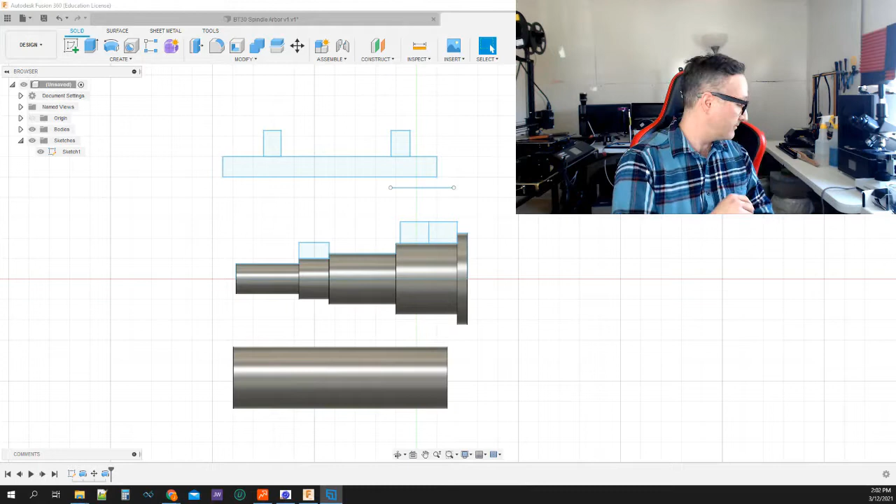But at any rate, the reason it may not necessarily, I should have grabbed a tool holder. I don't have one sitting around me.

A little BT30 tool holder. The reason an imperfection in there doesn't always affect the net runout is because those are nice, hardened cones that you're sticking in there. Sometimes whatever that imperfection is gets bridged, and it doesn't really come into play. And depending on where the imperfection is on the taper, that also makes a difference. So really, to get the best reading of your runout accuracy, the whole cone on the inside almost has to be taken into consideration.

Now, if there's something the indicator is really going nuts over, then there's probably a problem. But I've seen guys rotate one of these and think, oh, this thing is out of whack. But by the time they got their tooling in there, it's like, okay, I'm getting just as good results as one that measured differently. What gives? It's because of the whole thing, how it connects to each other.

You've got to have what's called a test bar, and they make them for each size. They have them for BT30, Cat 40, all the BTs, Cats, and HSKs. The advantage is that when you mount it inside your spindle, it now takes into consideration all of the different surface anomalies that your indicator may have detected, which may or may not make a difference in what the net runout is to you.

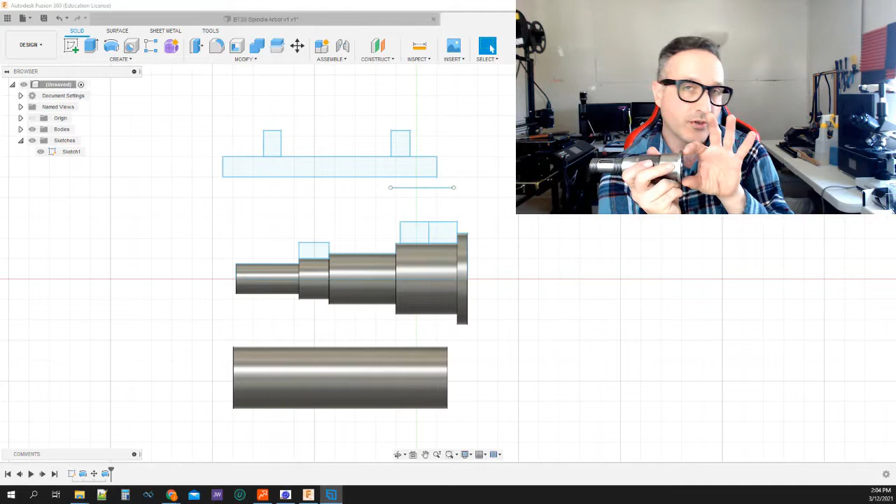So that sticks in there, it pulls in there with a pull bar, and then a certain portion of a straight shank comes out here and sets. And you have to get a quality one, and I'll tell you why.

So what happens is you'll put your indicator out at the farthest most point, and as you rotate this, now you can start to get an idea of what its net accuracy is, and that will give it to you combined with what the bearings accuracy is going to be, what the accuracy of this taper is going to be, all interacting together. That's the way to do it.

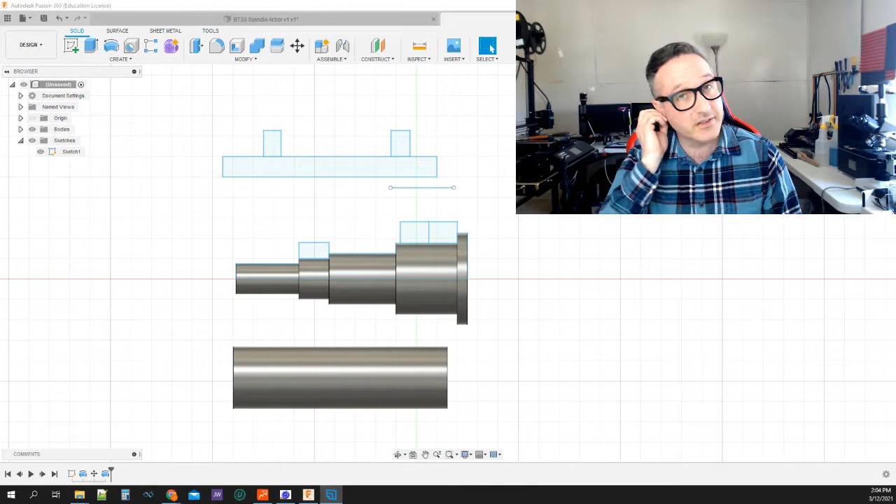Now, the test bars, you've got to be really careful even on which test bar you get, because if you decide, oh, look, I found a test bar I can get out of Asia, pretty cheap. Well, there's really going to be no way of knowing what you've genuinely got until you send that off to get it certified. And the other portion is you sometimes don't know the quality or what the hardness of it is, or if it's got some deformation, when you pull that thing tight.

The best way is to get a certified test bar, either out of Europe or stateside. And they're not cheap, unfortunately. For the average guy, it's not real practical, because you could probably pick up a used one for between $500 and $1,000, but you're gonna have to get it recertified. New ones, man, they can be in the thousands pretty easily. So it's kind of an expensive thing that might ultimately end up being academic for you, but that's the only way to genuinely measure it.

And if you're putting an indicator on there, it can give you an idea of the runout, but it's not really what you need to know. Unfortunately, there's no easy way other than spending the money on that thing. But again, if it's a big imperfection, it's a problem. So now you know how you can measure it. So if you're making something that's conical and it rotates, now you know how to. You'd have to get a custom ground something or other to put in there, and that'll be really expensive. Or you just want to measure the taper on your machine.

Okay, so let's talk about, I'm going to take a drink here. Let's talk about grinding, and some of you guys said you wanted to do some grinding. There's different types of grinding, of course. A gazillion types, just OD, ID, which is what we're going to talk about because that's where experience is. But there's also surface grinders. There are rotary surface grinders. There are double disc grinders. There's centerless grinders. So lots of grinders. We'll talk about just ID/OD.

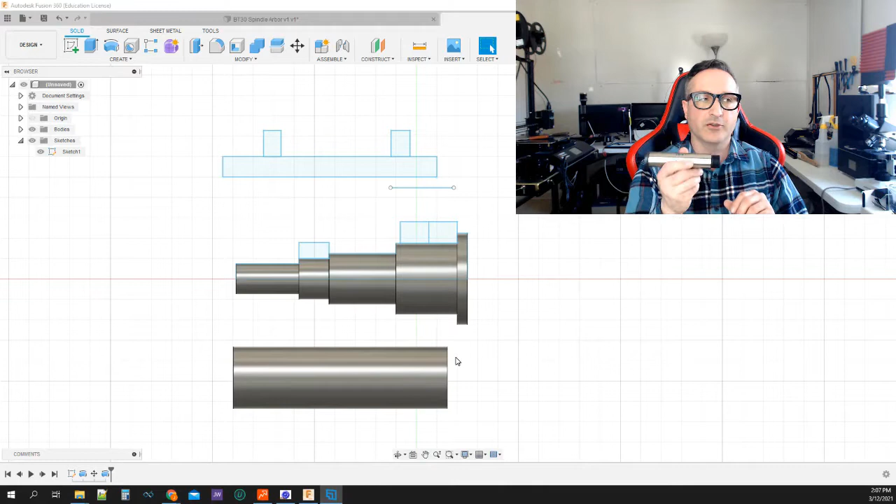Very easy. In fact, I just said I wouldn't talk about different grinding strategies, but here's one. So let's say this bar, maybe they'll put it in a centerless grinder to get the thing really round. And now that it's really round, maybe they'll clamp it into whatever machine is going to cut its final shape. This thing is really round because it was ground ahead of time on the surface before they cut any other features, so when they put this in for a final grinding of maybe an inside feature or a face, they know it doesn't take much work to indicate this in to do the grind.

But what gets more complex is, okay, you've got this flat surface area, but now you've got a conical part on the inside that has to be dealt with. So now it adds a little bit of new complexity. But see, all of our headstocks, the spindles we used in them prior to introducing the new variety, they were all just straight shanked, which was very easy for grinding, and we never really had to think about it. We just told them this is the accuracy we need, and the machine shop would cut the piece and then they'd go off to the grinders and just be done.

But we had a bit of an educational curve when it came to making something a little more complex like this. It's because there's steps in here. And this is what we didn't know, and I'll give you a little bit of history of how we even came to this. Some of you know this: the first couple batches of these, and this is one of the defective ones we got out of China.

They messed them up a couple times, and we've had to have spindles remade so many times. It is embarrassing to even tell anybody how many times these were redone, in whole or in part, before we actually finally got down to how these had to be done, and ultimately ended up having to change the manufacturing strategy to get what we need.

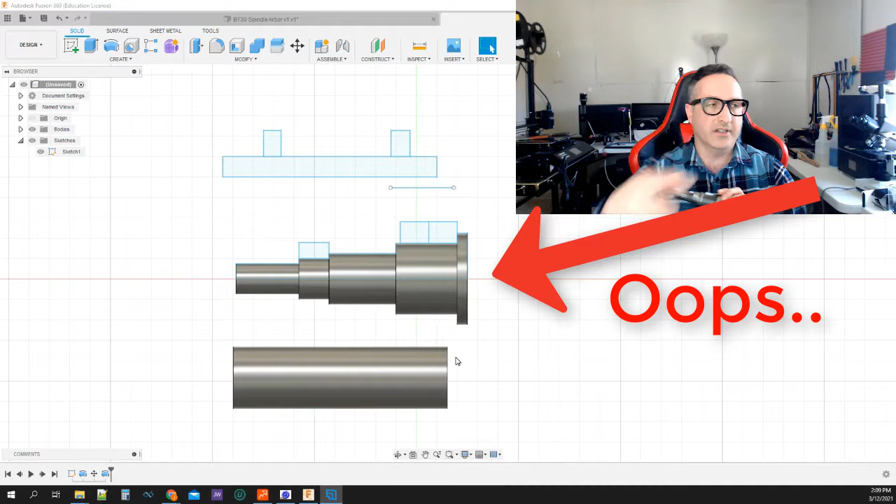Okay, so the area that gets complex that we didn't realize is each spot that there's a bearing. Now, if you look on the screen over here, you have to forgive me if my eyes are going all over the place. I have multiple screens. So if you look at the screen down here, you'll see this is, let's say, an example of a spindle arbor that's got multiple steps in it. And this is going to represent where the bearings sit on the spindle once it's installed.

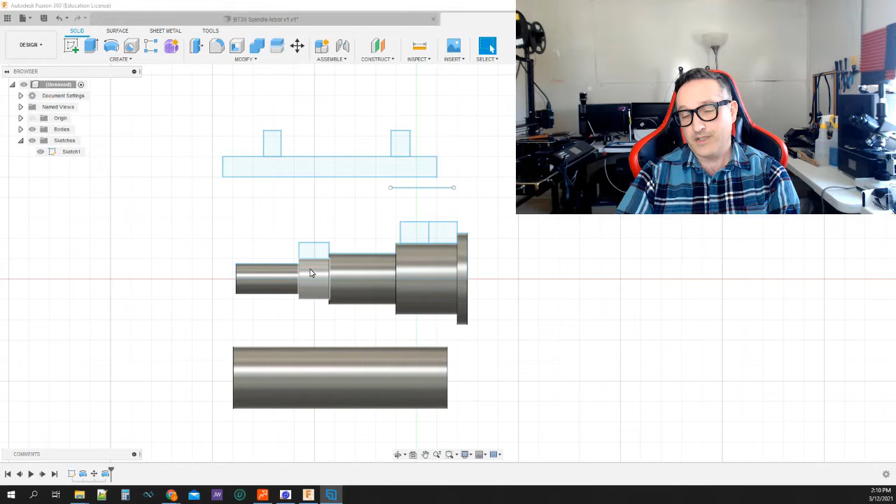Now, these areas are going to be critical for your grinder. What they have to do is put a test indicator here, here, here, and here. So each area where the bearing race is: a bearing sits here, a bearing sits here, and a bearing sits here. So they will figure out what the runout is on each of those, okay? And then they have to average it.

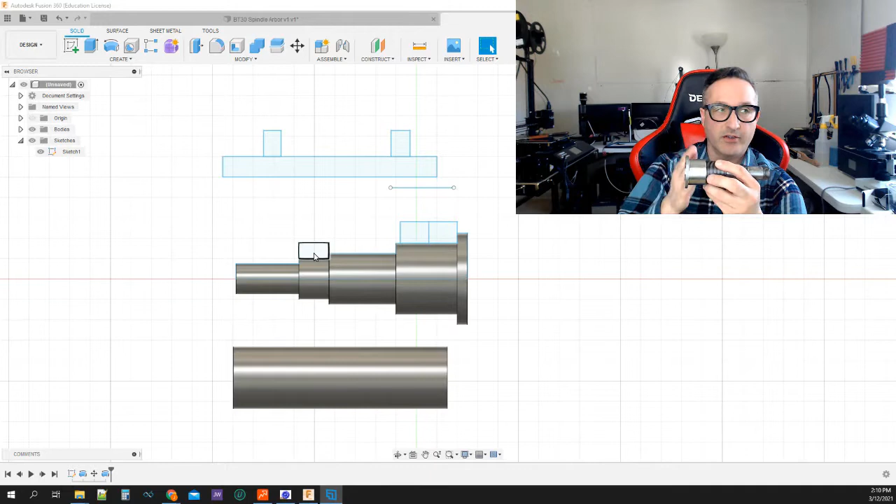So they'll average it, so then they'll know how much runout this thing will ultimately have, because we know it's not going to be perfect. You're not going to actually produce anything literally perfect, like 2 millionths or something like that. So they know, okay, now we got the average, so that when we come in here and sweep the inside of this taper, as a whole, it's going to be accurate.

Because you can't just do this surface right here, or just this area, and think, okay, since we know the runout here, we'll chuck this, and then you come in and do the sweep. Can't be done, because if you look on the screen again, this bearing that sits over here in the back, if it's not right and the runout is different enough from this, it's still going to be doing this kind of thing. So it has to be right all the way across.

It gets a little more complex because these all have to be dialed in, so to speak, manually. When they're setting these up, it's time consuming for the grinding shop to actually do these. And I thought they were just putting these in machines and going, basically. I knew they had to do some setup, but not as much.

In fact, the grinding shop that we ultimately landed on wouldn't even allow us to photograph the setup or show it being done, because apparently their strategy is kind of their bread and butter and trade secret. So anyway, the different areas here, different steps, can make it a little more complex, and the longer the part, it could also be more complex too.

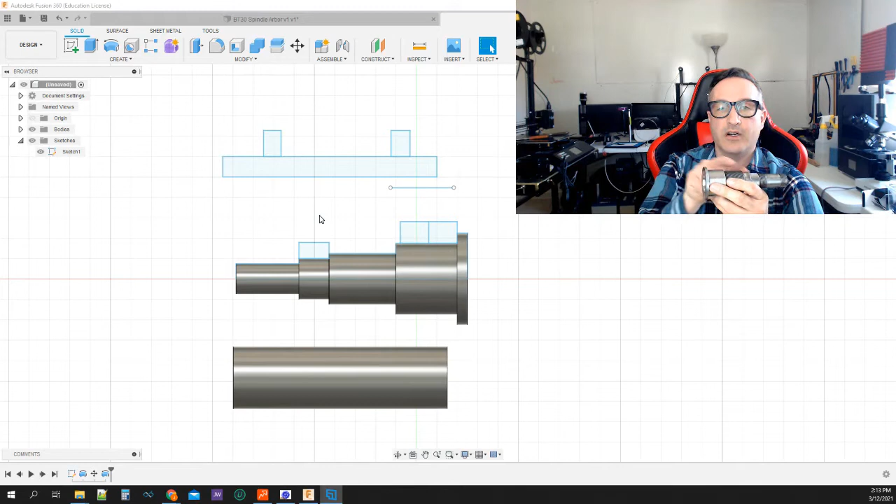So this area where these bearing races sit ended up being critically important. We knew it was important, but they ended up being more critical than we thought. Because if either of them has very much runout, or the combined average runout is very high, then you can't get a good grind. And you can't go back and regrind these surfaces, because then it'll be out of spec for seating the bearings.

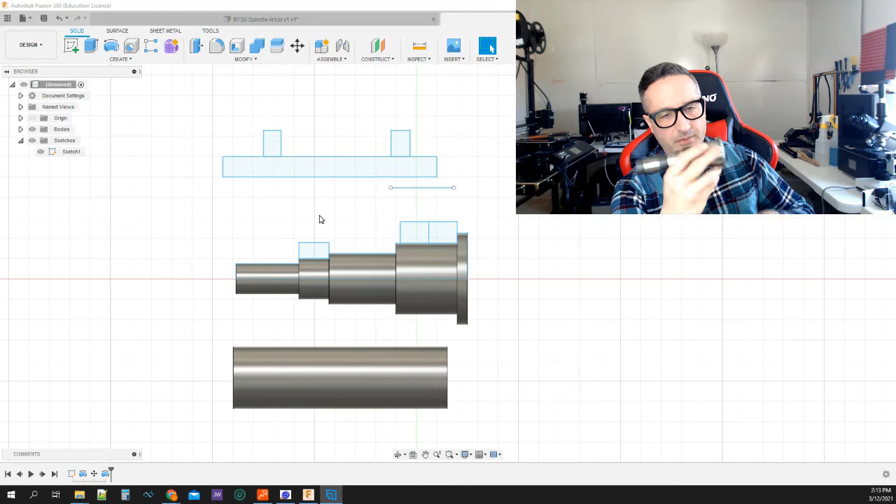And I'll tell you how we discovered this. We discovered this because when we finally got a machine shop that would do us right here, and we got all these cut, and then we sent them all off to get ground, we knew that we got a box of them back of each size of spindle. It's like, these are unusable because they're going to be too far out.

But as we got to assembling some of these, we noticed that there is definitely a portion of them that by the time everything was all assembled and put together, the runout wasn't where it should be. It was maybe anywhere from, let's say, 7/10,000ths, 8 to 9/10,000ths, and some of them even over 1/1,000th. And we had to go back to the grinding shop and say, hey, what are we doing wrong? What gives?

And that's when we found out they indicate these in different spots, and then they have to set this in there. These get all set in manually, and that meant we had to change our strategy as far as how this is manufacturing.

And something for you to consider too, if you're going to get something ground, especially if it's going to be conical or something that's kind of an odd shape, or you got steps in it, talk to the grinding shop first. Sometimes they don't always think like a machinist, though. It's kind of weird. I don't know what it is. Sometimes they can give you some input. Sometimes they don't. When they don't, then it ends up being trial and error and money.

But changing the strategy on this, we ended up having to either make a choice of continue to have these all turned on the lathes and then send them out like we did to the grinding shop, and just know that a certain portion of them aren't going to be any good. And we didn't want to do that,

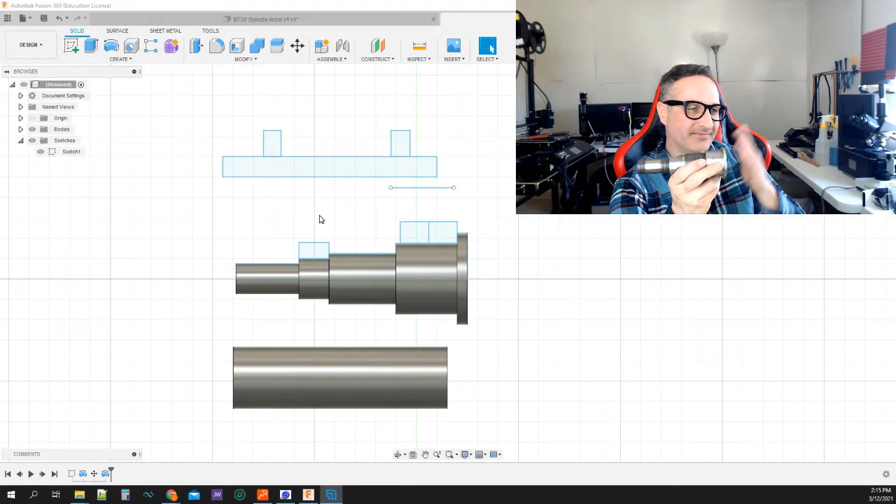So what we ended up doing is, when these come from the shop, cut on a lathe, there's a little extra material on these different surfaces, and then we have the bearing surfaces ground to where they need to be, and then that means we can get this surface and this face ground to where we need them to be, and that, in a nutshell, is what we didn't even realize ahead of time.

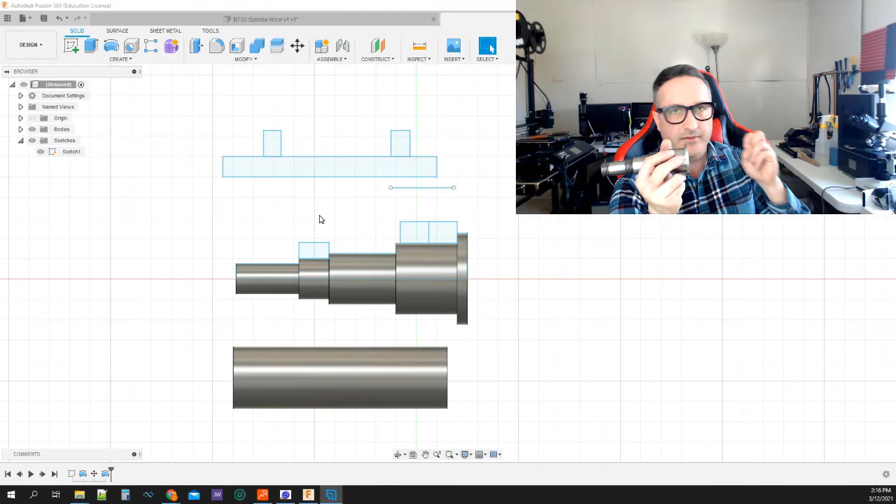Now, if you're introducing a new product, there's always going to be something that you just don't know until you move forward, and you have to make the best decision you can with the information you have and move forward. Otherwise, nothing ever gets done and nothing gets to market.

And what I've also learned too, I know it's a little extra, is each time you have something, let's say on the screen here, you have this CAD drawing that you made and it gets deleted somehow, or something corrupts it, and you don't have access to it, or these mini disasters, like, oh my goodness, COVID hit and this is all delayed, and oh my goodness, they made these things incorrectly over in Asia, and we know they're not going to give you your money back, and each time you have something like this happen.

It's terrible. It is terrible, and it's a growing pain, and it can be a pain for you. It can be a pain for your customer base, but ultimately, it's weird because like on the drawing down here, I've had drawings, and it's my own fault, and sometimes it's not my fault, that the thing gets altered or changed, or something happens that I got to start all over again. But the weird thing is when you start all over again on things, the next rendition that you make is a whole lot better than what you had made that you lost, and it's like, okay, so now this is the way this actually should be.

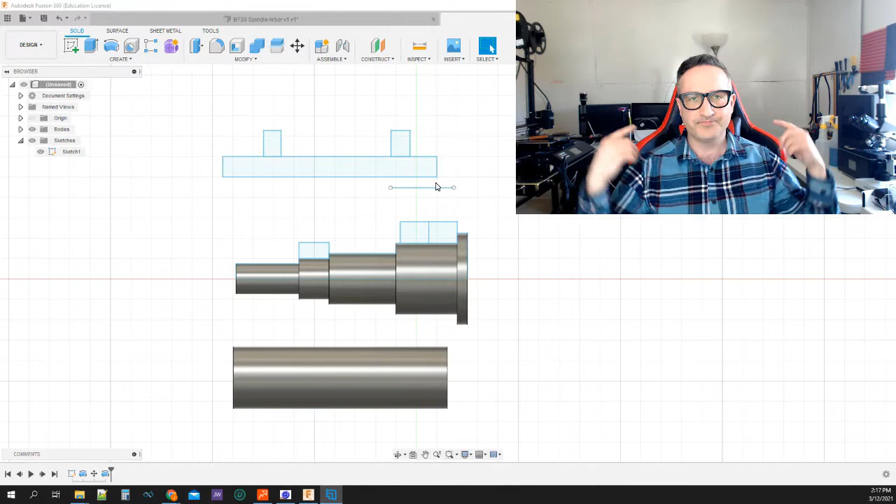So while it's kind of maddening, and you want to kick the couch once in a while when something happens, a file gets deleted, oftentimes it turns out decent. And the weird thing I've discovered is when you're moving forward and you're making parts, and we use a lot of 3D printers, I'll make a video on 3D printing stuff for prototypes. We use a lot of 3D printers, and you start making parts. A lot of what you make is actually junk before you get to where you really need to be for a part. But you want to take mental notes, if not physical notes, of the things that quote-unquote go wrong, because sometimes your best ideas come from whatever those disasters are.

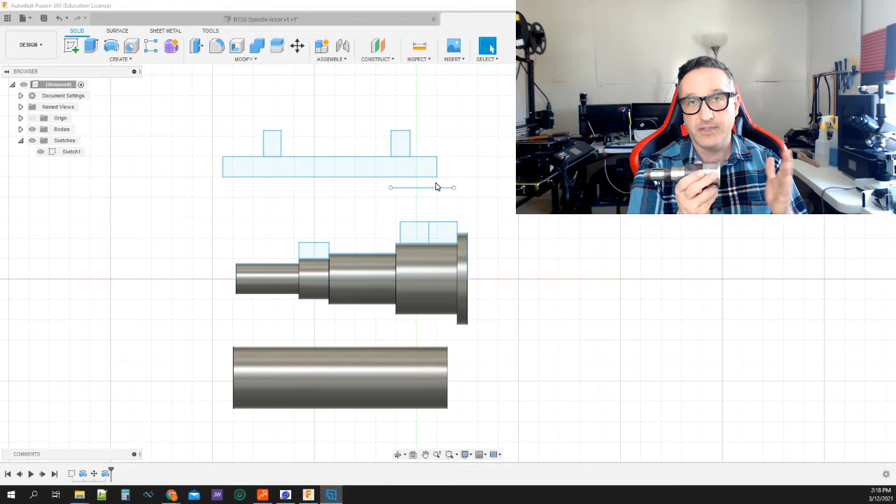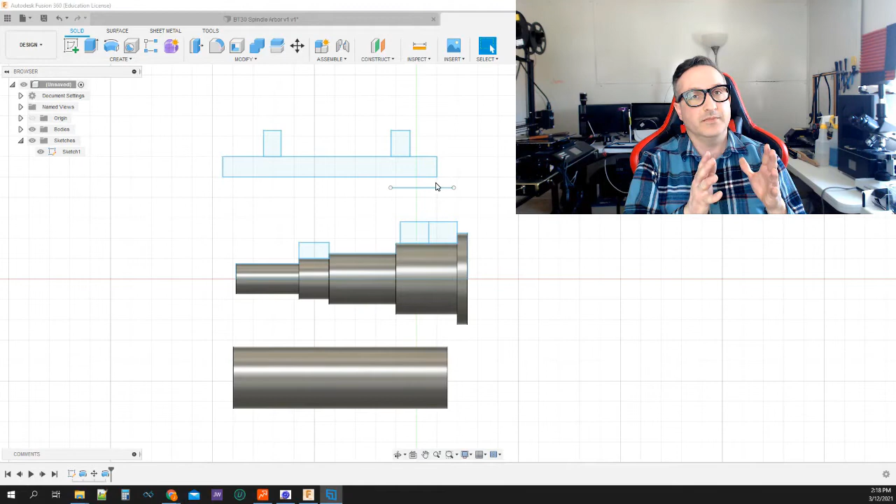And for us, the finished product on this, once we figured everything out, ended up being far better than what was originally done. And one thing, I'm going to throw this in here too. Yes, we did have another manufacturing strategy, where we bonded these in the bearings and everything, and then had them ground in here by a spindle repair shop. Well, we can no longer do that because the shop we were using was actually just kind of doing us a favor. And after COVID started, they were like, okay, we're changing a process. We really need to have it at such and such a price in line with our other customers. And then these went to like $1,000 or $1,200 each to do, which was just totally unrealistic. So we couldn't grind it that way anymore, in case you recall me talking about it at some point.

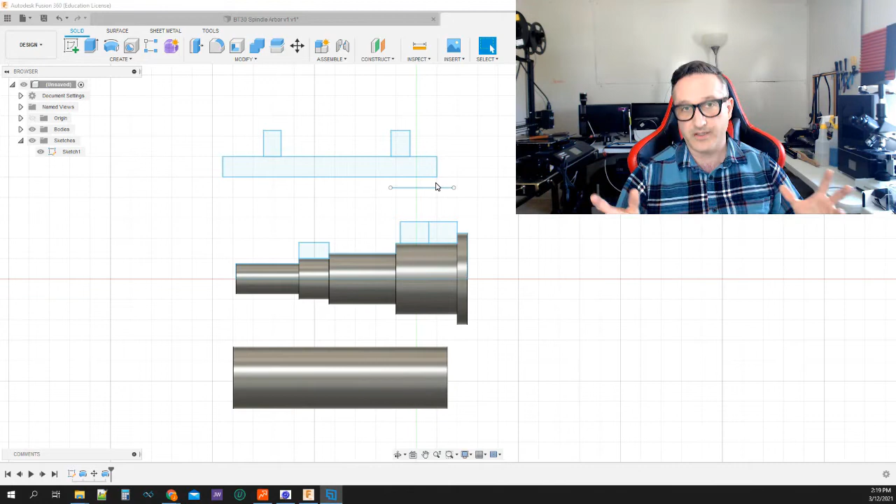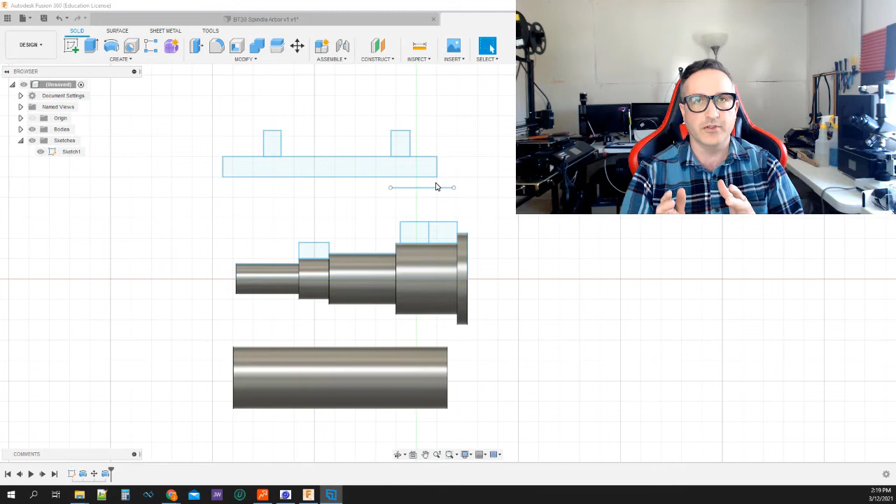Any rate, yeah, each time you've got an iteration, something that needs to change because something's happened, it is a pain, but the biggest pain I would say is probably the amount of time it eats up. Because if you need to make a change in such a way that, okay, I can't really use this, you're kind of in the back of the line again with the shops that you're working with, because they may have had a gazillion orders come in, or they might have a big customer that's going to take priority and pushes you back. It's also happened a few times that the shop you're working with might have an emergency order come in that they've just got to take, maybe because it's a customer they had prior, or the money is so good they kind of got to take it, and it'll push you back.

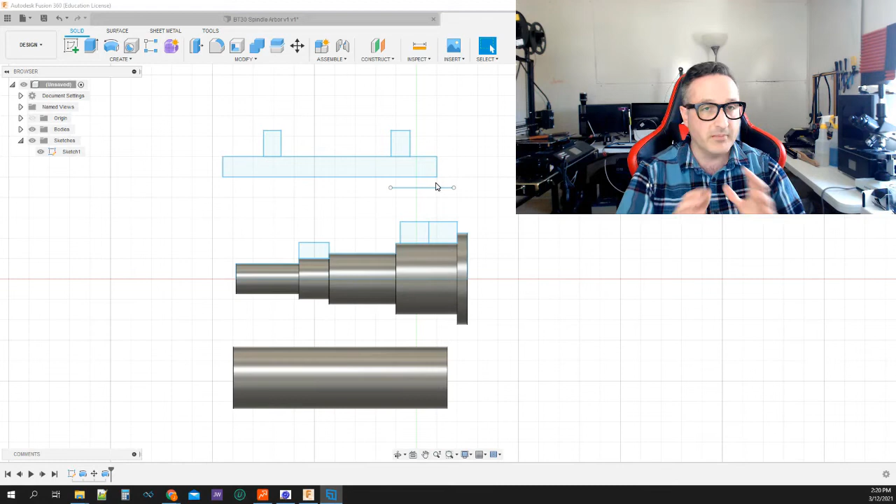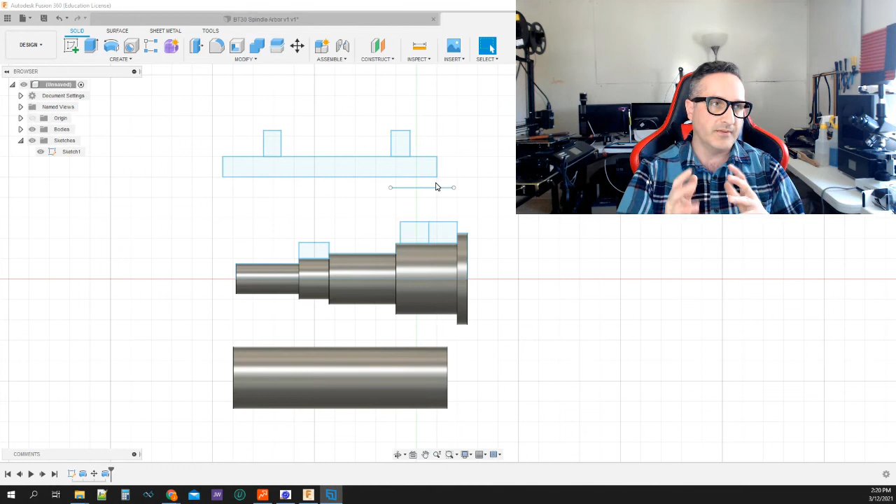So each iteration, that's the biggest frustration, I think, when you're making a product and putting it out, if you don't own the machines, maybe because the machines are just so astronomically costly, and you won't be running them enough to make sense, or put an employee in front of it. So anyway, it's the time in between each iteration, because if you're doing a small order of $50,000 or $100,000 on something, that's small potatoes for the shop, and you could be pushed off and pushed off and pushed off. So the way around that ultimately is, as you get everything figured out, then you kind of have a supply, and it becomes a whole lot easier moving forward.

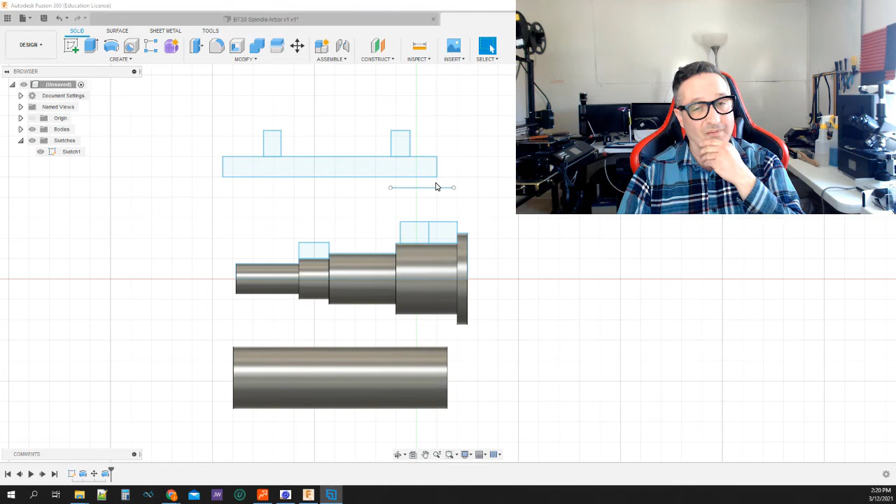So I know that was more history than you probably wanted to know in this particular video, but that's what we learned. If you're going into grinding and it's something that's going to be new to you, you might have to do different iterations. And also know that grinding is expensive, and they may not always know what something is going to cost you until they have done it a few times. That could make or break whether the product makes sense for whatever you're doing.